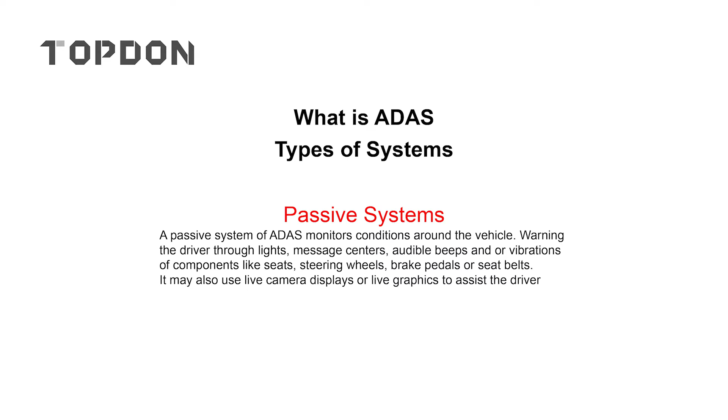So I've been in a lot of vehicles where it buzzes the seat. And if you have someone in your blind spot and you put your turn signal on, it will vibrate that side of the seat saying, warning, warning, there's somebody here, don't go there. So that is a passive system.

And then we have our active systems. So the active systems are the ones that not only tell you you're a horrible driver, but they also take control of your car because you are a horrible driver. So these are the systems that will actually slow down your car. It will push you back into your lane. It will do the adaptive cruise control. If you're getting too close to somebody, it will slow you down. It will apply the brakes via the ABS module.

And if we think about all the different systems that a vehicle takes to be able to operate ADAS, we're talking not only the power steering module, but we're talking electric brakes, we're talking the ABS, we're talking throttle control, PCM, and much more. All these systems have to communicate with each other for the system to work properly. And if there's any communication errors or one of these systems is not functioning properly, it can throw the whole thing off.

I've actually had some vehicles where if you have a TPMS light on because your tire is low, it will also set the traction control and ABS light on because it can't control the vehicle if you get into an off camber or into a yaw rate position. So when you shut down the ABS and the traction control, you also shut down your ADAS system. So something as simple as a sensor in your tire measuring your tire pressure can shut the whole system down.

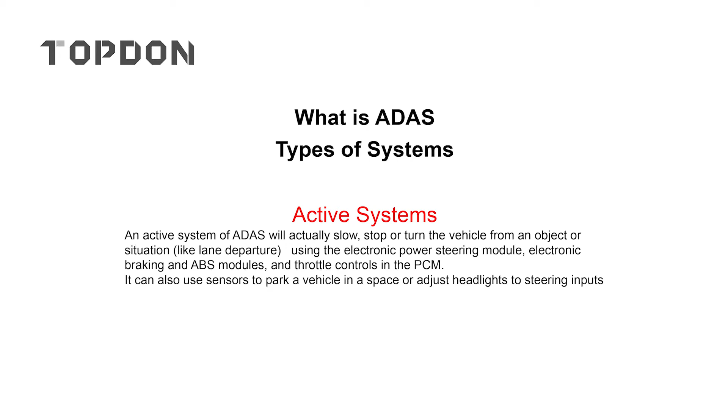So we talk about some of the different pieces and parts that go with ADAS and what we have to have on these vehicles. And this is just some of them, just a few of the systems and their types.

These are lane departure warning, blind spot detection, so whenever someone's coming up beside you and you can't see them, your car will notify you. Rear collision warning is if you're backing out of a parking spot and someone is coming that you can't see, it will actually apply the brakes and stop that vehicle for you.

Around view is the 360-degree camera. When you put it in reverse, it shows all the way around the vehicle. Night vision is on our higher end vehicles. A lot of Volkswagens, Mercedes, Cadillacs do night vision, where it'll actually display on a heads-up display showing if there's anything that gives off a heat signature like a deer or an animal or a bear or something along those lines.

Those are all passive systems, but they're also included as important pieces of the active system. The active system adds others like adaptive cruise control, lane keep assist, adaptive front lighting. Adaptive front lighting is where your brights automatically turn on or turn off as you're going down the road. And then front collision avoidance and much more.

One quick thing, Chad. I did a little research into ADAS. I think there's some sort of standardization of these things in terms of 0 through 5, correct me if I'm wrong, in terms of how much control the vehicle takes over. For example, on a 0, it might be just airbags, right? They don't do anything to help anybody, whereas something on a 1 might offer a buzz or a vibration, but if you go all the way up to a 5, that's when the vehicle actually starts taking over full control.

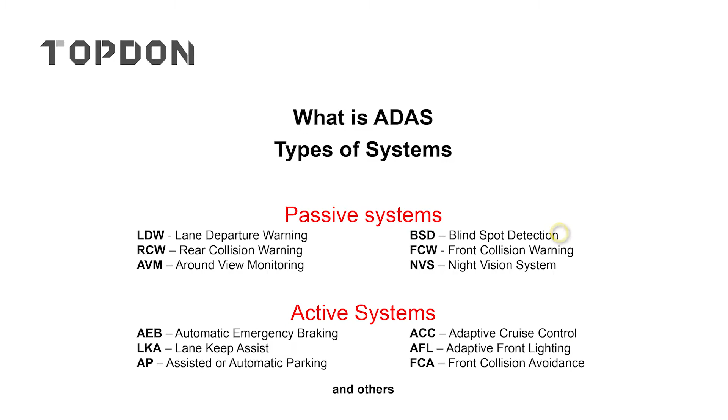So when we look at some of these things on the screen, the passive and active systems, it takes sensors on that car to be able to control and see that, because a car doesn't have the same style of vision and processing that we can do on a human level. So we look here on the left, these are short, mid, and long range radar. These are all radar sensors.

And a radar sensor is just like we think of a normal radar in a submarine. It's sending a signal out, it's bouncing off and sending that signal back. But we have to have different radars for different ranges.

We have to have a long range radar, and that is used in adaptive cruise control to know if we are approaching or getting closer to somebody. We have to have that mid range that is going to be for adaptive cruise control and for collision avoidance. And then we have to have that short range, which is going to be for our parking sensors, if we're getting really close to a wall or a parking stop or something along those lines.

So a fun story of a customer that had come into a shop, a little old lady had a Cadillac. And she comes in and says, my Cadillac, my car is possessed. Okay, well ma'am, what do you mean by that? And she says, well, I'll just be driving down the road.

I got the cruise control on, just cruising down the highway, and all of a sudden the car will just slam on the brakes right in the middle of the road. It just jams on the brakes. So the technician in the shop takes this car and goes for a drive and does exactly the same thing this lady says, gets on the highway, puts the cruise control on, nobody around, and all of a sudden the car just freaks out and slams on the brakes right in the middle of the highway.

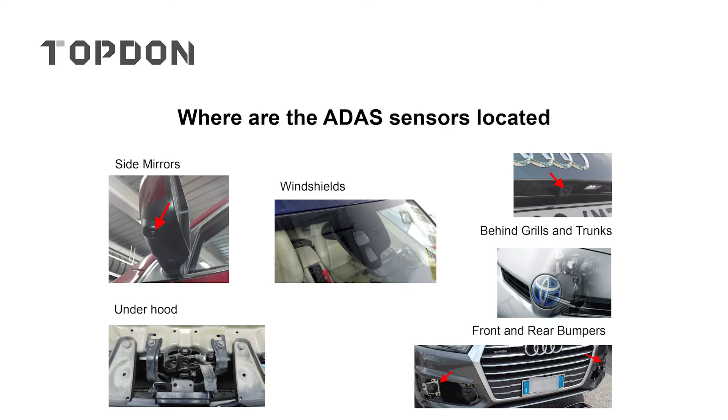So we've got sensors all over the car now, and anytime they're disturbed or their environment changes, we have to do a calibration on them.

So if we do an air conditioning service on a Mini Cooper, for instance, you have to remove that front bumper cover, and now all of a sudden you have to recalibrate that sensor. If we replace the glass in a vehicle, we have to recalibrate that sensor too because we changed the lens on that camera.

So when is a calibration required? Well, the OE has very specific requirements for that, but generally speaking: after a collision, after the hood or trunk is removed or replaced, if the front or rear bumper is removed, or windshield and mirror replacements.

And this is where people get confused, on suspension rework or alignment, because everything we do focuses on the center line of that car. If we change the alignment, now we change the center line. So we have to align the car, and then we have to do ADAS calibration after that.

If people curb their car, like that bumper sensor I was telling you about, or even if a module is replaced - remember I talked about all those different systems that use ADAS - if one of those is replaced, then we have to recalibrate a whole bunch of different systems inside that car.

Question, Chad. Sure. This is, I guess, maybe an easy question or a dumb question, but if any of these things do happen - something happens, or you replace your bumper, hood, windshield - will your ADAS system tell you that something is off and needs attention?

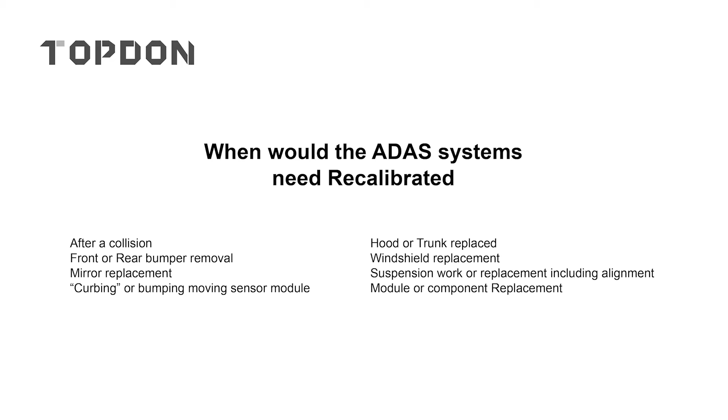So I have a question as well. I've asked the product manager in China, and I also used to talk with technicians in China. Before we had this kind of calibration tools for ADAS, what did technicians do to calibrate for this kind of problem?

Take it to the dealer.

Take it to the dealer, because a lot of those tools were specialized, and a technician could not do it because they had no access to those calibrations. Let me give you an example.

In China, most cars are not equipped with the full feature set the dealer advertises, so there's a lot of DIY. People add components after they purchase the car. Some garages doing this DIY job draw paper targets and put backgrounds on the ground to do the 360 calibration. So I used to ask them, when you don't have ADAS tools, how do you do the calibration?

I had my Mercedes E-Class facing the same problem two years ago, because my wife had a small accident that put the front camera out of correct position, and an alert kept coming up on the dashboard. So I took it to my friend, and we didn't have ADAS tools yet.

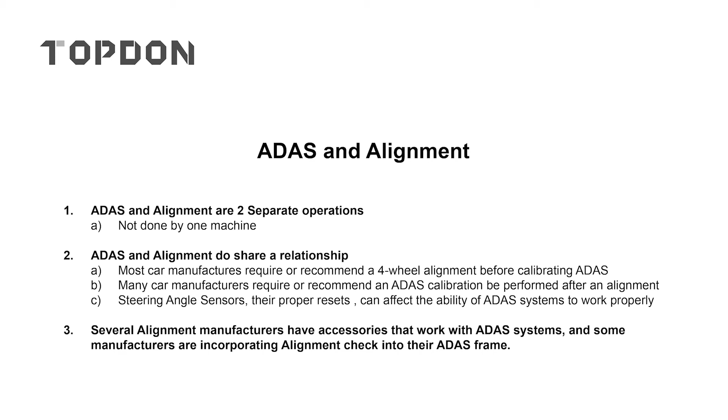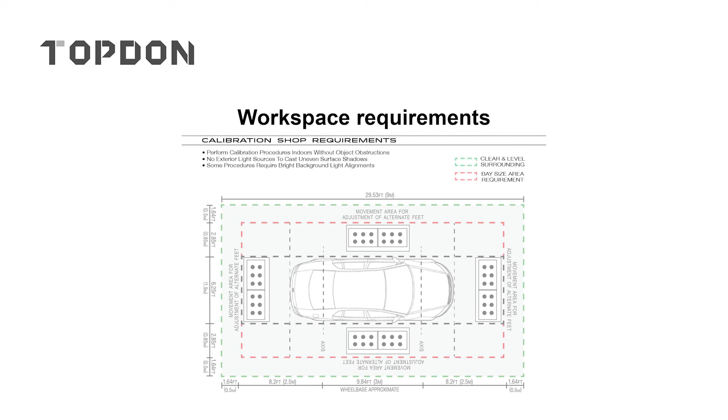And the floor probably has to be level, correct? Perfectly level? Yep. The OE says you can have like a half inch over 10 feet or something crazy like that. It's pretty darn close to being level, yes.

The next question we always got was, can you do ADAS calibration on an alignment bay? And the answer is kind of, sort of, maybe, and yes. The reason it's kind of, sort of, is because it depends on what kind of alignment rack you have. If you have an alignment rack with 4 posts sticking up, no, you can't do that, because the posts get in the way of the cameras, and the camera will see that, so you can't calibrate.

If your alignment bay is a scissor style, that's good, but some of those scissor styles sit too high off the ground. So now we have 12 inches of lift plus an SUV, so now we're too tall, and the calibration frame can't go that tall to do that calibration. So I don't like encouraging people to do that, because most of the time they don't have enough room in front of the car anyway. And they can only do lane departure warning. So I usually encourage people to just have a clear open space so they don't have to deal with that.

That must be a serious issue for most mom and pop shops, because that's the space they have - there's some sort of bay or lift equipment that the cars are always on. It's usually a deal breaker for a lot of companies that say, I can't do ADAS now because of that.

And on that same note, we can't do ADAS outside because our targets are black and white. And if you're outside in the sun and a cloud comes over and causes shadows, you're causing issues. So it has to be done in a controlled environment. That's a deal breaker for a lot of people.

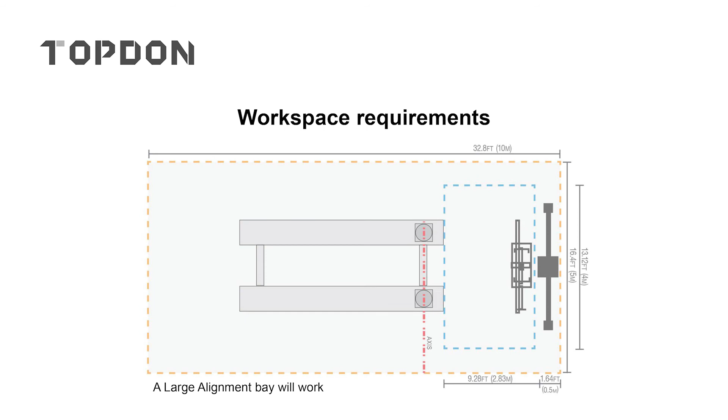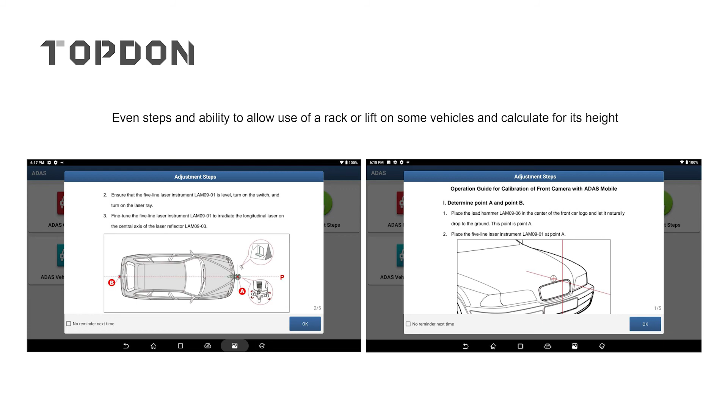It's very tough. So when we look at the TOPDON tools and how this process works, we actually give step-by-step guidance on the tool itself. We're going to tell you how to find the center line of that vehicle, what products and procedures you're going to need to do that center line. It's going to show you how to find the center line via the plumb bob. All that's directly on the tool. This makes it very nice for the end user, because they don't have to search for anything else. They don't have to go find a user manual or find anything special. It's automatically right there on that tool.

Okay, so this is what you were talking about earlier, Harry. There are 2 types of calibrations: a static calibration and a dynamic calibration. A static calibration, as described, is stationary - you're static in one place. A static calibration uses a target that is placed in front or around the vehicle to do that calibration, and it uses specific targets for different manufacturers, and those specific targets are used at different distances from that vehicle or from that sensor.

The second version is dynamic. That means I need to go drive the vehicle, and when you drive it, it will self-calibrate. Now, some manufacturers, you have to know what that driving cycle is.

On some manufacturers, it says you need to be on a clear road with very well painted lines with objects on the side of the road. It wants to see mailboxes, trees, objects on the side of the road so it can calibrate itself.

There are some manufacturers that want you to stalk other drivers. They tell you you need to get within 10 feet of the vehicle in front of you and follow them at a speed range of 40 to 54 miles per hour for a set amount of time. So each drive cycle is different per manufacturer.

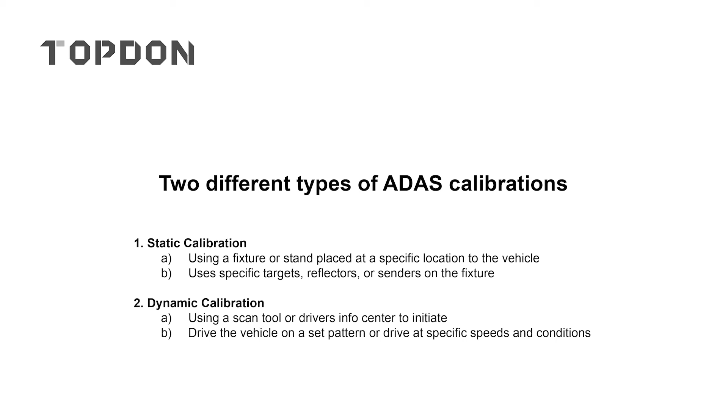So when we look at the different ADAS systems in the market, it's become very competitive, I think is the right term, competitive over the last 2 years.

So the first style that you will see is, I call it the stationary calibration frame. These are large frames that are hard to move. They're heavy, and they hold the target board, and they have this large crossbar going across the front.

That large crossbar gives us the ability to do calibrations much faster, because we can attach lasers to the wheels. That laser will shoot up and reflect off that target, and that gives us center. Then you turn these lasers on top of the bar, and that shoots back at our other targets, and that gives us square. So now I don't have any strings on the ground.

I don't have any tape. I don't have any of that hooey going on. I can just use those lasers back and forth, boom, bada bing, 5 minutes, I'm set up to run.

Some manufacturers are actually putting cameras on the end of those now. That would be like Autel and Snap-on. They have cameras on the end, and that uses alignment technology, so you don't have lasers going back and forth. You can pull that frame to get your distance, twist, and get your perfect square just from those cameras.

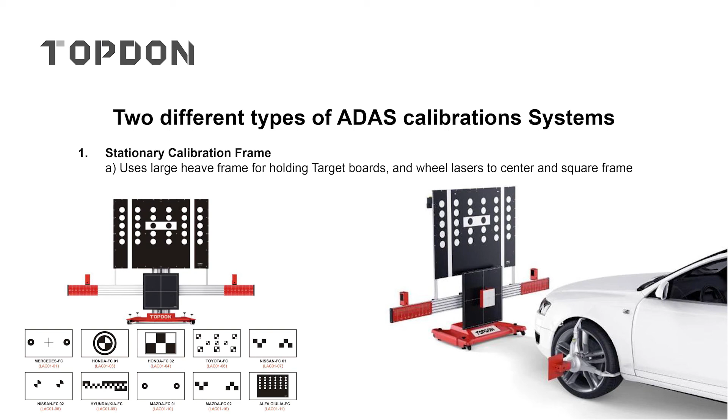That is only available on a stationary style frame, because you have to have that long crossbar. So there are benefits to having a stationary frame. One of those benefits is it's a faster setup, and it's easier to center and square that target.

Since it is a heavier frame, it's going to be less affected by a breeze or wind coming through. It's not just going to fall over on you, something crazy like that. It's easy to move around the shop with a low center of gravity. You don't have to worry about it falling over.

And that crossbar gives us multiple positions from one bar. What I mean is, if we think back to that Volkswagen Audi, they had a sensor on the driver's side and a sensor on the passenger side. There's a mirror that slides back and forth on that crossbar. It can set the frame and stop, and then that mirror can slide from side to side without having to reset a bunch of times. We can't do that on a portable frame because it doesn't have that crossbar.

Now, the negatives to these are they're freaking heavy, so they're not portable by any means. You can't roll them in and out of a trailer very easy, it's just a total pain in the butt. And it takes up a lot of space in your shop. I had one of these in my shop, and I hated it because it took up so much space. My shop's not big enough, so you have to consider the space requirements. And it can't be loaded by one person. If you need to move it to a different place, it's quite a feat to get it moved around.

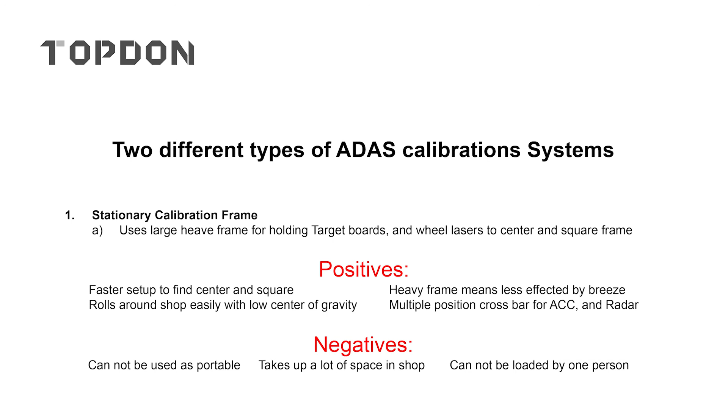So on the other side, we have a portable solution or a mobile solution. And the mobile solution uses a collapsible frame that's lightweight. This unit weighs 70 pounds, which is relatively lightweight, and it makes it a lot easier to transport. It folds up into a tight little package. You can pick it up, put it in a van, put it in the back of a truck, and it can be done by one person on the road. And we can see that the targets are very similar, going between the two different systems to calibrate these different vehicles.

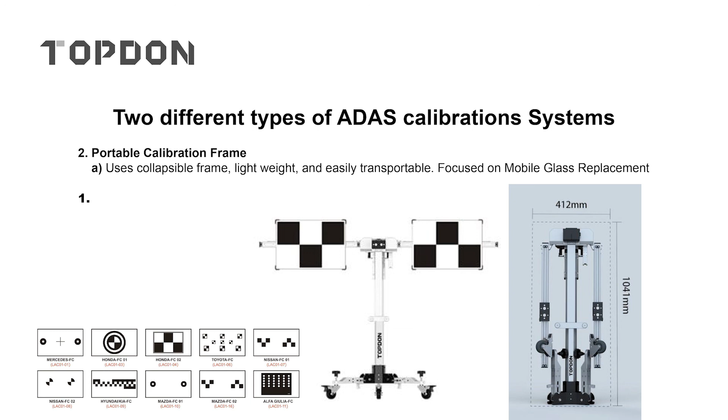Now, the positive side to this style of frame is that it is very portable. It's easily moved around, easy in and out of a van. So even our glass technicians can go to a body shop, replace the glass, then do the calibration right there on property, load up their equipment, and head out the door. It folds up and takes up less room in your shop or van, and it is expandable. You can add all the different targets and pieces to it by adding on different kits.

The negative side is it doesn't have that crossbar, so it's going to take more time to set up because you have to use lasers underneath the car. You do have to measure on the ground and put little tape marks and crosses. You do have to go through that whole process. And just like you see in the image there, we do have lasers built into the tool, so it helps with that, so you're not having to actually throw string underneath the car. There's no option for wheel-mounted lasers because they have nothing to point at.

The crossbars are not long enough to go outside a car, so you still have to use the lasers underneath the car. And if we're talking about that Volkswagen where we're calibrating that radar sensor up at the front, you have to do multiple positions because the mirror mounts in the center of that tool, and you have to move the whole tool into three separate positions.

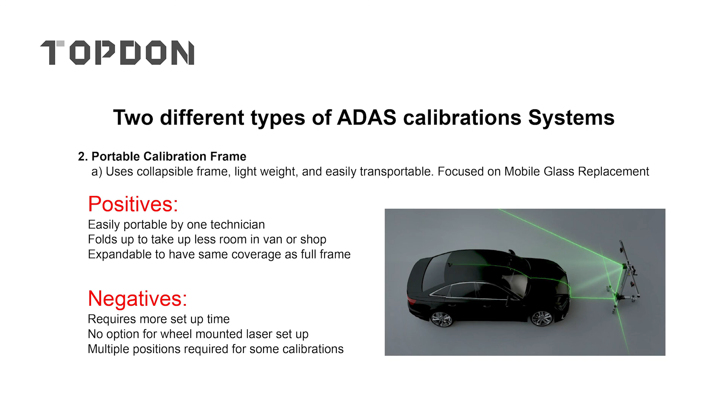So we talked about there's two major requirements you have to have. You have to have some sort of scan tool diagnostics, and you have to have something to hold the frame. Well, when it comes to the diagnostic side, this will work on any of the Phoenix line tools.

And I've been playing with the different tools and adding ADAS to them. And it does not, I've confirmed, it does not take up any more memory. It's actually just an activation. It turns on, boom, you're programming. You don't need to download anything else. Everything is already built into the tool, and you're up and running.

So it is going to be something that can be added on to any tool in the Phoenix lineup. So if they already have a Phoenix Plus, a Pro, or a Phoenix Lite, it doesn't matter. The ADAS calibration frame that they get with their TOPDON set comes with that card already in it. They open that card, type it into the tool, and they're up and running. They're ready to calibrate.

A couple of things of note on this system. It is heavy. The way it ships, it's over 450 pounds because it's very well crated. It's very well foamed in. So when we ship this out, it's going to need a lift gate or a forklift to get it off of that truck. It's about a 4x4 pallet. Comes in a big coffin. It's about 2 foot tall, and then boxes will stack on top of that.

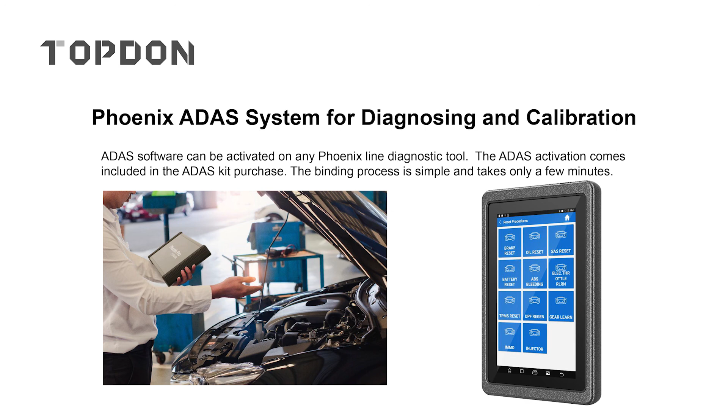We also have add-on accessories that I personally haven't put together yet, so I'm trying to put that kit together to give us the most competitive options when it comes to the kits in the industry.